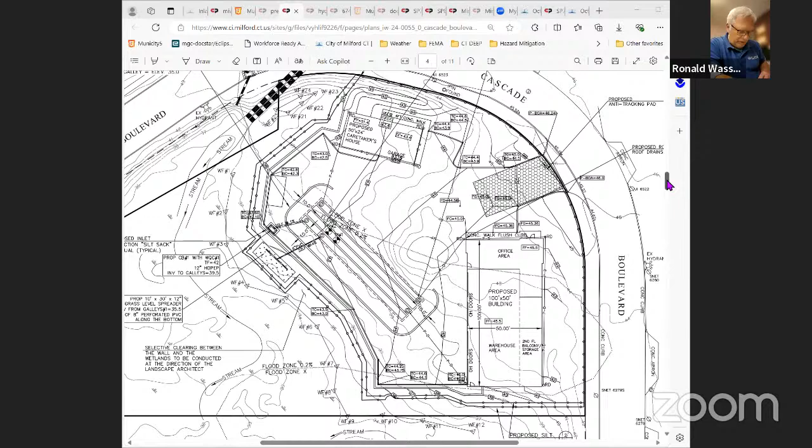Good evening, Ronald Wassmer, professional engineer, land surveyor with an office at 158 Research Drive. I think Mary Rose did a good job recapping what we've gone through so far. The city engineer has reviewed the plans and found them to be satisfactory. We've submitted the plan that shows existing trees. And then also with me this evening is Matt Popp. Matt drafted the landscaping plan that has some of the mitigation plantings, as well as being a professional wetland scientist to assist in the application. So if there's no questions by the commission, then I'll turn it over to Matt. If you have any questions for me, I will be happy to answer them. Thank you. Thanks, Ron.

Matthew Popp, landscape architect, professional wetland scientist from Environmental Land Solutions. I'm not sure we could get the landscaping plan up, or I could share my screen either. There we go. So just to go over it again, we'll talk mainly about the left side with the wetland buffer. We've got a number of shade trees, mainly oaks and red maples there, again mainly to provide shading of the asphalt, trying to keep the water temperature cool, to reduce thermal pollution.

We have a number of shrubs below. There's a wall there, below the wall. It's not that diverse, but mainly because we're just trying to get the species that the deer tend not to eat, the bayberry and the spicebush. They'll eat some of the other ones too, with the clethra, but we try to keep them healthy over the long term. Down on the southern or bottom part of the site, in the southeast, we have American holly that provides some screening from the residential building to the southeast. Again, the hollies are good for wildlife habitat. They provide cover.

Also, the deciduous trees we're proposing also provide a good wildlife habitat. I did, years ago, work on the residential development to the south where they had box turtles on the site. Luckily for this project, we are having a wall that will act as a wildlife buffer along the wetland edge. It's very important for this site.

If that map could go back, there was just an observation along the wetlands, I guess it's on the left side. In your expert opinion, is there any consideration to moving the buffer zone away from the wetlands a little more and encroaching more into the parking lot? Seems to me like there's this massive parking lot for a small building.

I'm not trying to re-engineer the plan. I'm trying to ask the question more directly. In your opinion, do any of the proposed modifications have an adverse impact on the wetlands? Well, I'm going to let Ron answer if the parking lot could be reduced in size. I think he did the layout for the vehicles that are using the site. I'm not sure how many people will be working here or if the number of parking spaces could be reduced at all.

But the main thing is the water quality runoff from this project, to cleanse that prior to being discharged into the wetlands. With the wall acting as a wildlife buffer, the wall is actually very desirable to have. As long as there are silt fences up during construction and we do the wildlife sweeps, there probably would be no adverse impact to the wetlands.

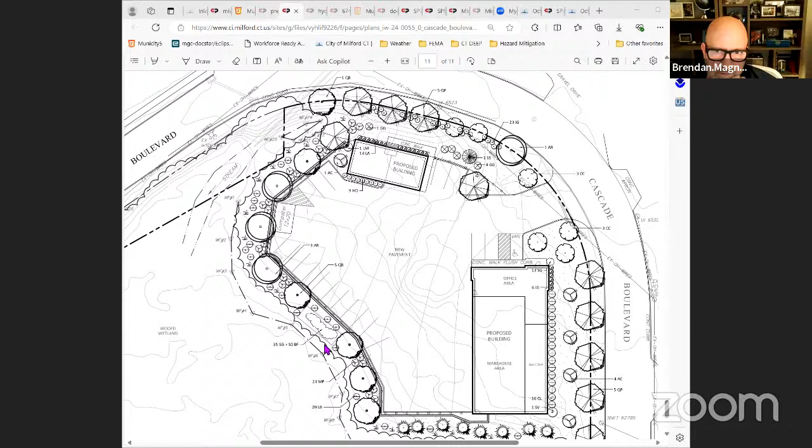Yeah, I think that buffer has got the right species. A lot of times I see the right species, but if there's deer around, the deer eat the plants, especially the shrubs. But I think these plants are deer resistant, or deer tolerant. The plants are fairly dense. But we could add a few more, like I said, tulip trees.

And I think if we do that, if during construction the erosion controls are maintained, and it's important to maintain that, and we put in the wall right off the start, one of the first things, just to keep any accidents from happening from vehicles going into the wetland buffer, there should be no adverse impact to this wetland system. Again, get the wall built early on. I think that was it.

Any advantage at all to expanding that buffer zone into the parking lot, or is that just not of any value? Maybe you're gonna have Ron address that, if that could be shifted at all. Sure. Because he did the layout for the vehicles using the site. Yeah, I'd be happy to answer that. The parking that we provided is generally conforming with the zoning requirements. This is being used for light manufacturing warehousing.

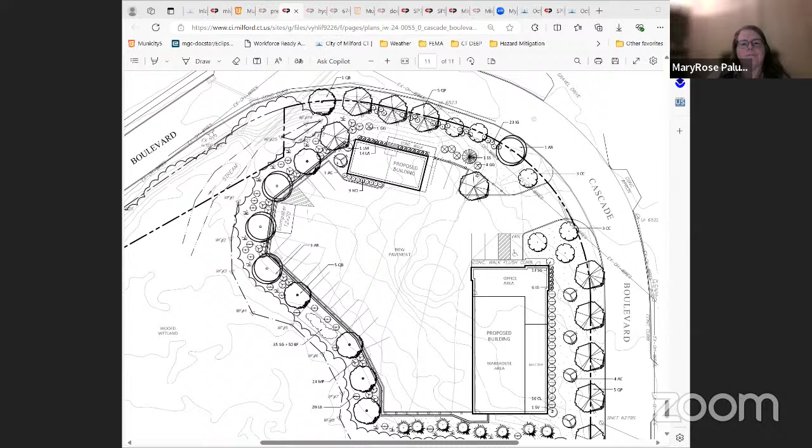The only other modification I think I would make, if you go back to your plan, Ron... This one? Yeah, just the wall that wraps around the site, attaches to the one building and wraps all the way around the parking. And then when it gets to the building up near the top of the sheet, there's a little bit of a gap. So I'm not sure if that could connect to the building.

It just completes that wildlife buffer or barrier, right? Sure. That wouldn't be a problem at all. Yeah, just to connect it. And if they needed steps, that's fine too. They can step up and down, and then it just makes the building act as a barrier.

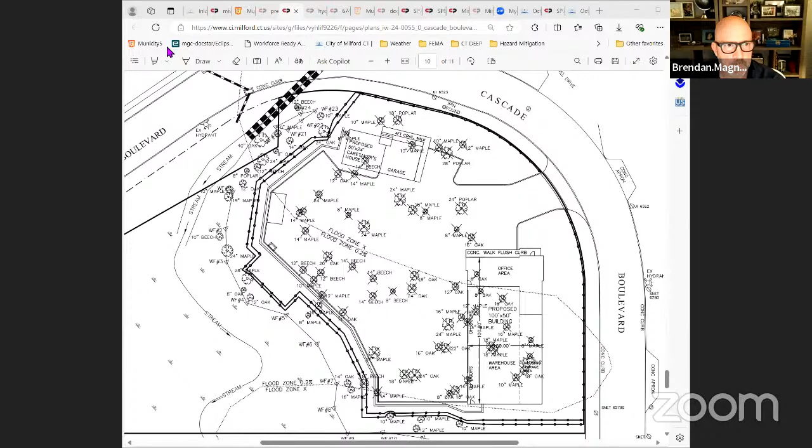Okay, so given the deliberation, is there someone that would like to make a motion? I agree with Mr. Field's sentiments. I think this is a very comprehensive review and I'm prepared to support approving it with the various conditions that we have in our standard motions. If I may, Mr. Chair, what we've just discussed. Sorry.

Matt, what was the number of tulip trees? Let me just hang on. 1, 2, 3, 4. I would say 5. You probably would go in between the trees. Yeah. And tulips are a little bit tougher to get, especially like a 3-inch caliper. So if they were like 1.5 inches or so, I think that'd be fine. And they grow quick.

So if someone wants to make a motion from the agency, we'll have Mary Rose read the motion. I'll make the motion to approve the plan. And I second it. We have a motion and second. I'm sorry, Mr. Munson, did you have a question before we entertain the motion? You raised your hand just as Jim spoke, sorry. Yeah, I just had one quick question.

In the section that we're looking at potentially doing for the mitigation bond, there is the possibility if the conditions weren't met, that we would have an additional 2 years or until the site meets the design. Mary Rose? That's typically the condition for mitigation. I think the chair's gonna have me read the whole motion in a second.

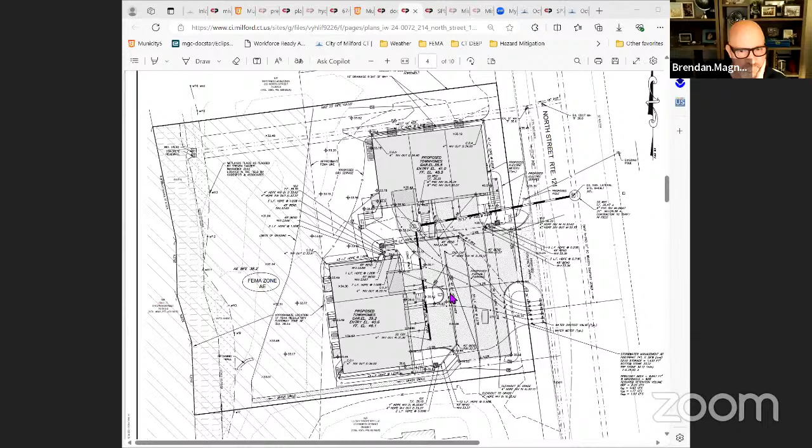Mr. Chairman, tonight we have Bob Weway of Codespoti & Associates to do a presentation for you. Bob had said he may have some video trouble, so I know he's on. I just don't think we have visual. Thank you. I think you have audio, right, Mary Rose? We can hear you. Okay, good. Would you have the ability to share screen? I do, Bob, but right now the chair has the floor. Sorry, Mr. Weway. I'm now handing the floor to you. Can you hear me? Yes. Okay. The floor is yours to present.

Which plan would you like up, Bob? Would I be able to share my screen? Oh, sure. That's even better. Try that now. It says it's disabled. No, try it now.

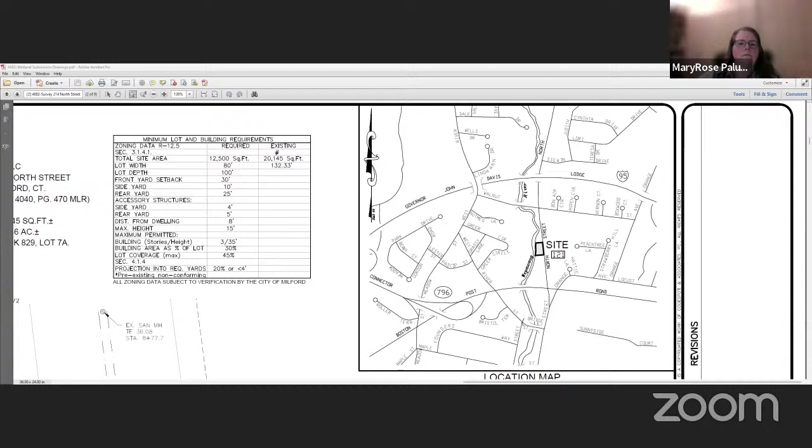Okay, so good evening. My name is Robert Wheway. I'm a licensed professional engineer in the state of Connecticut and principal with the firm of Codespoti and Associates, with offices located at 263 Boston Post Road in Orange, Connecticut. And we're here tonight on behalf of the owner, CN LLC, of which Nick Ricci is a principal.

What we're looking at right now is the sheet SV, which is the survey map. And I'm just basically giving you a blow-up of the site location. So what you can see from the site is we're basically wedged in on North Street between the Boston Post Road and the I-95 corridor up through here. So we're pretty much right in the middle of that. And we're bounded on the east by North Street, the west by the Wepawaug River, and residential properties to the north and south.

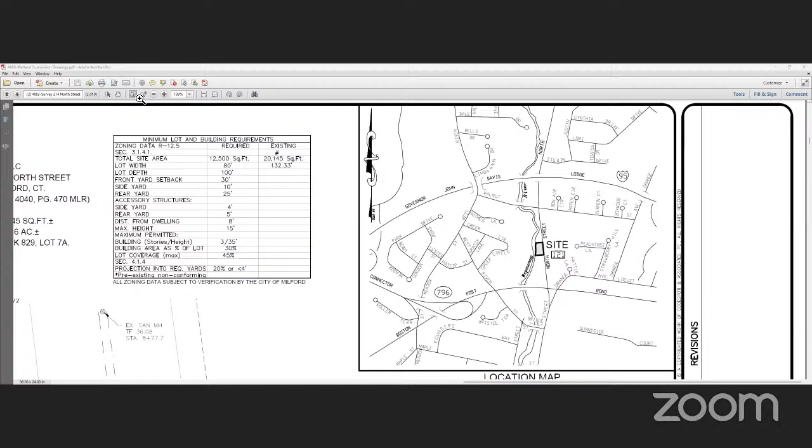The site is currently known as 214 North Street. It was originally part of a free split of 210 North Street, which took place a couple of years ago. And the site is 0.46 acres in size. And we'll just take a blow up of the area here. And what you can see here is that we're 0.46 on the acreage through there.

As Mary Rose pointed out, there's an existing foundation located up in this general area with an asphalt driveway, and then there was an additional extension of the barn or garage back in this area, which was demolished quite some time ago in conjunction with the barn. We have the existing drainage easement, which picks up runoff from North Street and is piped directly into the Wepawaug River up and through this area here. And that existing easement is to the state of Connecticut.

The wetlands, as Mary Rose pointed out, were flagged by Stephen Danzer in November of 2022 with flag numbers 7 through 15 being associated with the property. Wetland flag 7 is located down at the southern portion of the property, and wetland flag 15 is located just up to the north of the northerly property line. The wetlands that were in here consist of water, which would be the Wepawaug River, and we have the crosshatch on that, and then the pocket of wetlands that parallels that was basically identified as fluviquents by the soil scientist. The upland soils through this area here are identified as being Haven Urban Land Complex going through that area.

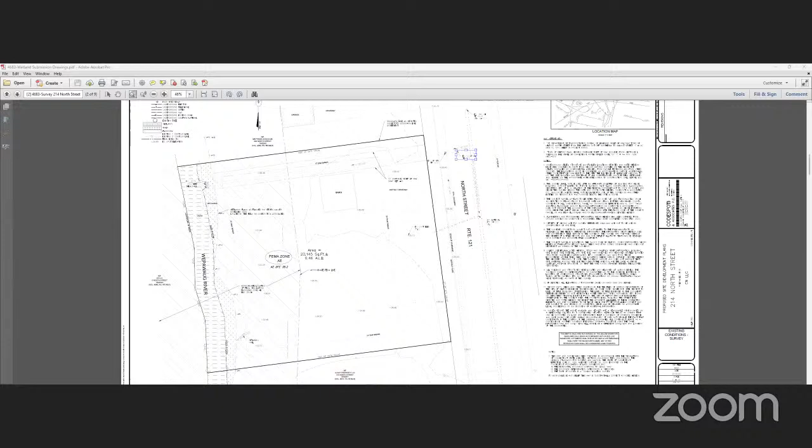Let's try this one. Is that better? Yes. Yes.

Okay, so just to go back and circle around again, we have the 2 proposed buildings, one here and one here. Each of these buildings will have 3 units consisting of 2-bedroom townhouses for a total of 6 units for the entire project. We've provided for a total of 12 parking spaces with interior parking on each of the buildings, one parking space for each unit, and then an additional 6 surface spaces on the outside for each particular unit there.

We have the proposed parking and paved area in through here, which will consist of permeable pavers, which will facilitate stormwater management for the project, which I'll get into in a little bit greater detail as we get into the plans. The proposed development will have a total of about 6,900 square feet of impervious surface consisting of the roof areas, the parking areas, as well as the associated sidewalks coming down through the project area.

The proposed development has been primarily situated to be within the eastern portion of the property, allowing us to provide for a minimum of a 45.9, say 46 feet distance from the closest wetland point to the building proper. And that's for the southern building. The northern building, we're able to provide a much larger buffer up in that area, and that will be approximately 75 feet off the wetland line.

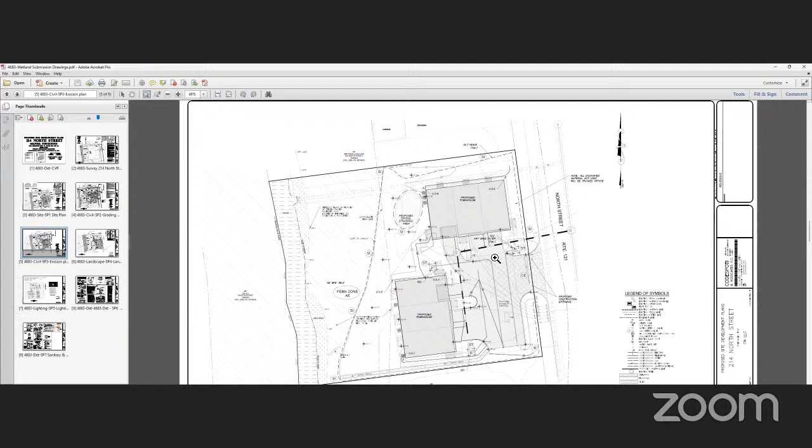And we've also provided for a detailed soil erosion and sediment control plan for the project. And we basically have the silt fencing, which will be following that cut line at approximate elevation 33. We provided for a construction entrance coming in off of North Street, as well as a stockpile area here and protection for all of our yard drain inlets coming in through that section.

It's intended to have the rear portion of the property maintained as a lawn area, just as it was previous to the development. And there will also be additional trees and shrubs provided along the rear portion of the property, as well as some trees being planted out on the frontage along the North Street property. So this is meant to be a passive recreation area coming up and through the back of the units to allow the occupants of the units to have some places to enjoy some recreational areas going through that section.

Now, David Lord also provided a wetlands functional and value assessment for the proposed project. And he basically looked at three primary functions that were identified, consisting of fish and shellfish habitat, sediment and shoreline stabilization, and wetland wildlife habitat. He also did a search of the natural diversity database, and it was indicated that the subject property is located within an area denoting the potential for state and/or federal listed plant and animal species.

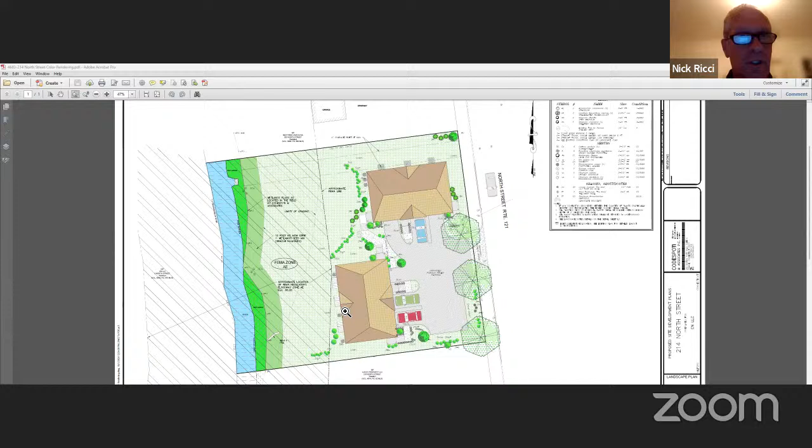I don't know if this is in our purview, but would it be possible to have any plantings down closer to the mow zone, no mow zone, that would delineate that and maybe mitigate any runoff from chemicals? I could check with Jeff from our office because he's a landscape architect. So what you're asking is can there be something a little bit more linear placed along that 10-foot mow strip? Yeah, that would be my thinking on that.

So a consideration might be a low berm, but I think I heard Mr. Wheway mention that there were proposed plantings. I haven't drilled into the plan, but I think we should understand that, Mr. Wheway. What are the proposed plantings in that strip zone? I think you mentioned there would be some. Yes, Mr. Chairman, thank you. Is there a plan for snow removal?

For snow removal? No, well, we have a snow shelf here, and that's identified on the plan here. Snow shelf here, a small area up in here, and then as what's typical with any of these developments for any excessive snows, if the snow shelf areas exceed the capacity, then the snow has to be packed up and moved off site. Okay.

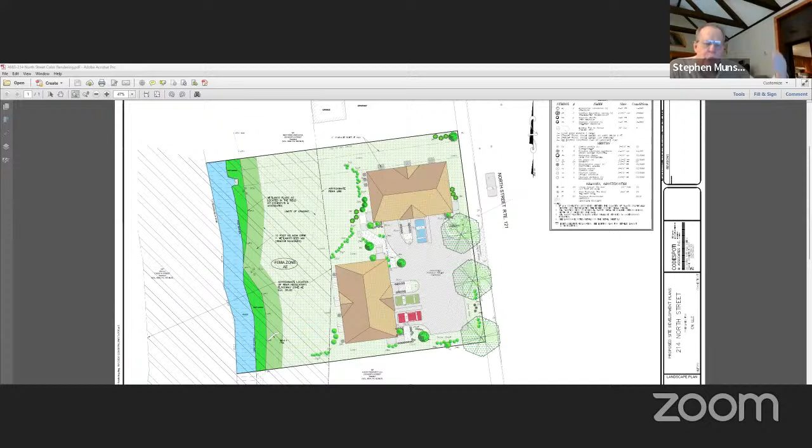Well, obviously you want to mark it as you want it identified as wetlands. And I think also that you can do all kinds of things in a sign. The less activity people have back there is better. Don't take anything out, don't put anything in, kind of thing. Since they're tenants, that may be turning over. So I think as much information as is relevant, I think you should put on the sign. If it was condos, that'd be a different thing. But yeah, I think identifying it as wetlands, and saying what you can and can't do.

Mary Rose, question for you. Will the engineer review this documentation in the next week or so before the next meeting? Right. This was sent over to the city engineer on Friday. So we're hoping to have a review back in time for Mr. Wheway to respond before the next meeting. Okay. Anything further, Mary Rose?

Nope. So we want information on snow removal, vegetative buffer, wetland signage, and I imagine the stormwater maintenance plan is embedded in the plans. We'll need that in a document form because that's going to need to be added to the deed at some point. Yeah, Mary Rose, the operations and maintenance plan, that was part of the stormwater permit. It's part of the appendix. If you need me to split that off, I could give that to you as a separate document. Great. Thank you.

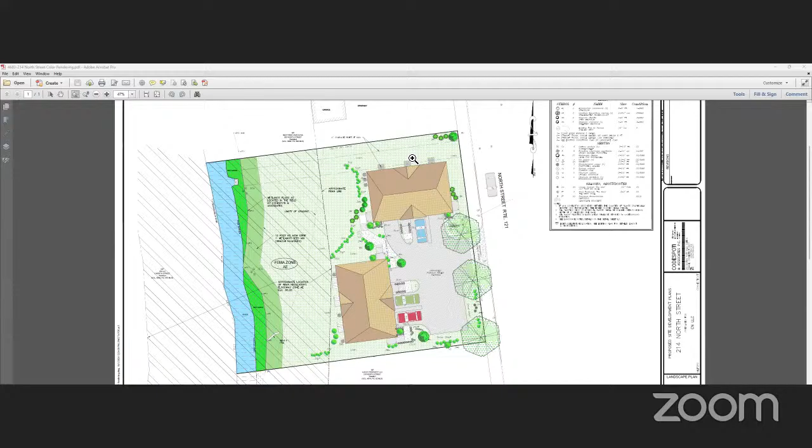Now, with respect to the snow removal plan, is there anything else that you need? Because again, we did identify the snow shelf areas on the landscape plan. So is there something more that you're looking for beyond that? Sorry, is it the colored landscape plan? Because I'm not noting that. I apologize. Well, it's on the one that's rendered, but it should also be on the uncolored landscape plan. Okay. So it's the two spots in the southern half of the site where you're proposing snow will be placed.

Yeah, let me. Yeah, so these have been identified here as snow shelf areas. Is that sufficient given the area of the site? Yeah, again, the parking is not that big. It's only the parking area, I think, is about 4,500 square feet.

I mean, to your question, Mr. Weiwei, normally we have a narrative that talks about what would happen in the event it needs to be taken off site, et cetera, et cetera. Okay, so you're looking for a little bit further clarification on it then? Okay. Normally it's part of the plan. There's like a write-up around it.

Mr. Ricci, did you have something to add? Yes, on the plans, I don't see a dumpster area. Is that going to be somewhere on the property too, or where would that be located? No, I think we're not anticipating a dumpster. Basically the trash units will stay in the garages and then they'll be put out on the day of pickup. Okay.

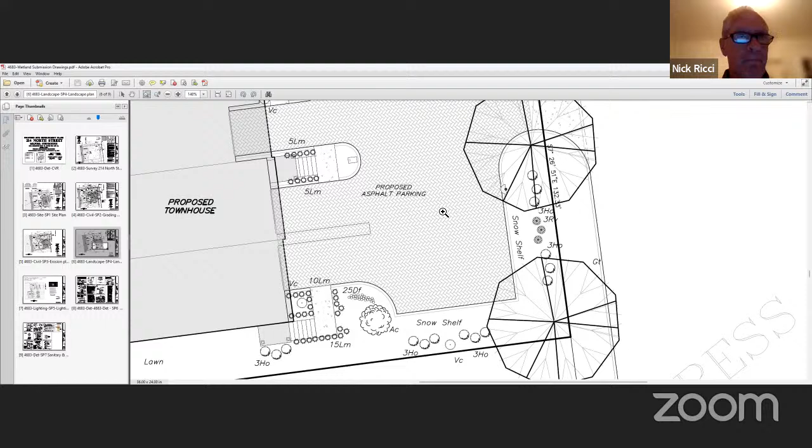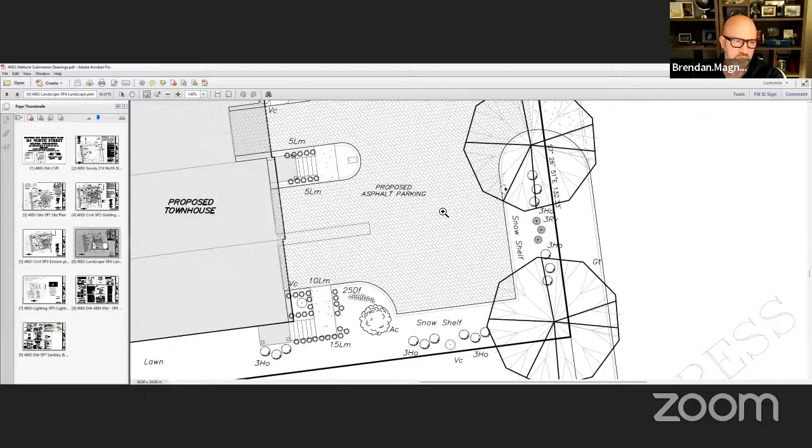Okay, so if there's no other discussion points, again, if for some reason, as you're reviewing the documentation, you have questions, please direct them to Mary Rose via email or call the office, and she'll convey them to the applicant. Thank you for your presentation, Mr. Weiwei and Mr. Vecino. Have a good evening. All right, thank you.

Moving on to item number F, I believe it is, consideration of the September 4th regular meeting minutes as presented. Do we have a motion to approve those as presented? So moved. Second. Motion from Mr. Munson and second from Mr. Ricci. Through you, Mr. Chair, we also have the site walk minutes. I had left them off the notes. I apologize. Okay, let's take this one up and then we'll do that one. Any discussion on the motion? Hearing none, Lisa, roll call vote.

Daniel Bedecker, Aye. Ranjit Bahav, Aye. Brian Black, Abstain. Jim Connors, Aye. Buddy Field, Aye. Steve Munson, Aye. Nick Ricci, Aye. Julie Valvo, Aye. Brendan Magnan, Aye. Thank you. The motion carries. And now next, do we have a motion to approve the site walk minutes as presented?